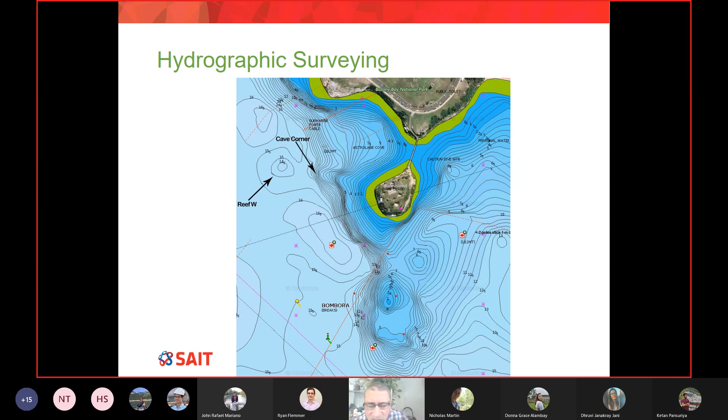And simply the purpose of this presentation was nothing more than to show you that surveying is not really as simple as what you thought when you had your first year course. I can tell you nothing can be built without surveying.

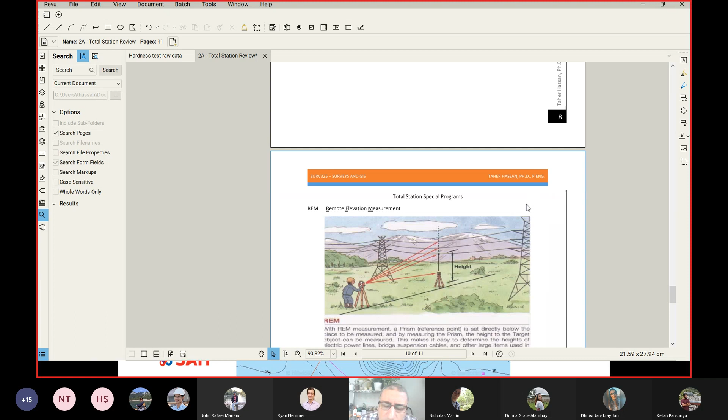So my next topic in our class, I have some slides available on D2L, which is a revision of total station. I know some of you will say, you know what, we had this before, so you're kind of repeating yourself, and I'm pretty sure I'm not. I am going to put everything in one perspective, and this ties into our next topic in our class, which is data processing.

So total station, what it does, it simply locates one point in space. It means with the help of total station, I can find XYZ. And I'm pretty sure that you guys know what XYZ means. Let me remind you. So I'm not going to do 3D. I'm going to make things simple. I'm going to make it 2D.

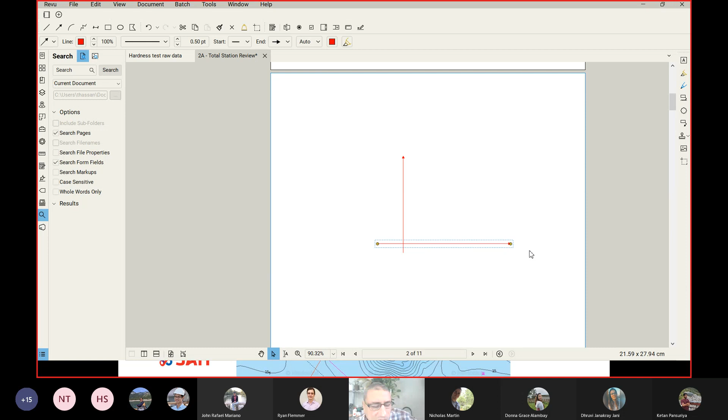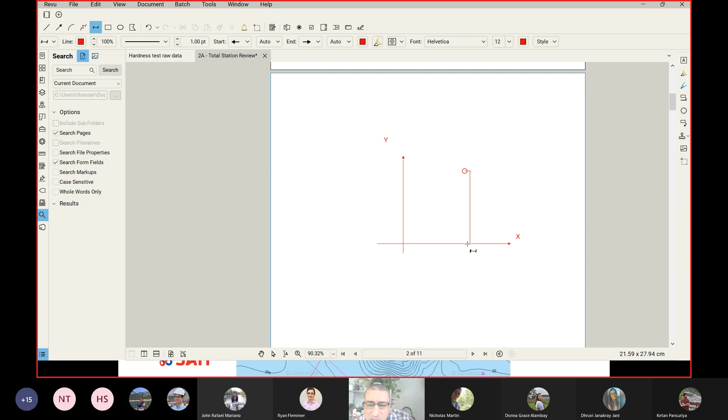So you guys know that there's something called Cartesian coordinates, and in Cartesian coordinates, this is your X, and this is your Y. And simply, if you have a point, let's say I have a point here. So this is my point. When I say locate the point, it means I want to find this point in relationship to the X, and this is called the Y dimension or the Y coordinate.

In addition, I want to locate this point relative to my Y axis, and then this will be my X coordinate. So again, if you expand the idea to Z, then you will see another dimension, which is the height of the point. So this is what total station does. It finds for you the X, Y, Z of one unknown point.

And by the way, if you know the X, Y, Z, then you can answer so many other questions. For example, if we know the X, Y, Z of 2 points, then we're able to find the distance between the 2 points. If we know the X, Y, Z of 2 points, we can find the height difference between the 2 points. If we know the X, Y, Z of so many points, which create a surface, then we can find the volume to, for example, do one project.

And if we know the X, Y, Z of so many points, guess what? We can come up with a map, because a map is nothing more than a bunch of X, Y, Z connected using line work. That creates your buildings and road edges and so on. So this is what we will be doing in the next class. For now, I want you to understand that total station simply finds for you the XYZ.

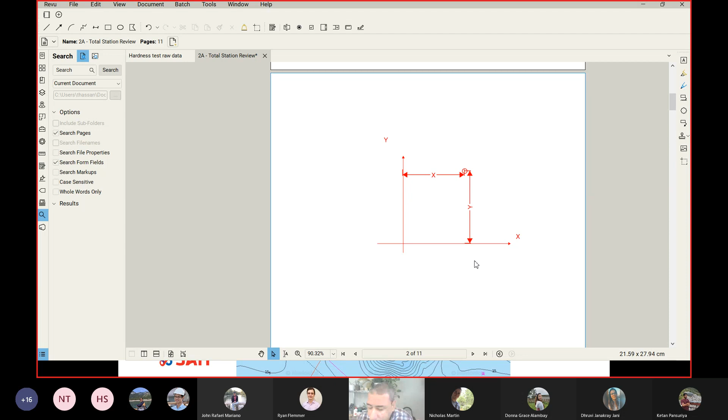So the first step when you try to measure the XYZ, not really measuring the XYZ, the first step is to create a frame of coordinates. And we do that through points called traverse points. Please, I need confirmation. Does anybody in this class remember the word traverse? Probably I want to write it for you. Okay, here we go. So here is the word traverse.

Okay, so anybody still remember from first year the word traverse? Please confirm. It takes you a little to unmute yourself and say, yes, I can remember. Yeah, I can remember about the traverse. Not much. At least I feel I'm not talking to myself. I remember something. Okay, so traverse, thank you so much.

And traverse is simply a few points, many points. It depends on the size of your area. And these points, we pick them carefully. Remember this, pick them carefully on site. So the traverse point location is not just any point on site, not random, because simply, number one, they cannot be in the middle of the road. Can they be? Can't be, otherwise they will be easily damaged, or the person who is surveying will be unsafe. So it has to be off the road.

Number two, there is an intervisibility condition. So whenever you are on top of one point, you need to see the previous point and the next point, because when we place these points on site, next we do some measurement. And our measurement in surveying requires line of sight. It means I need to be able to see from one traverse point the previous and the next point. So anyway, bottom line is traverse points are a collection of points that we carefully pick on site.

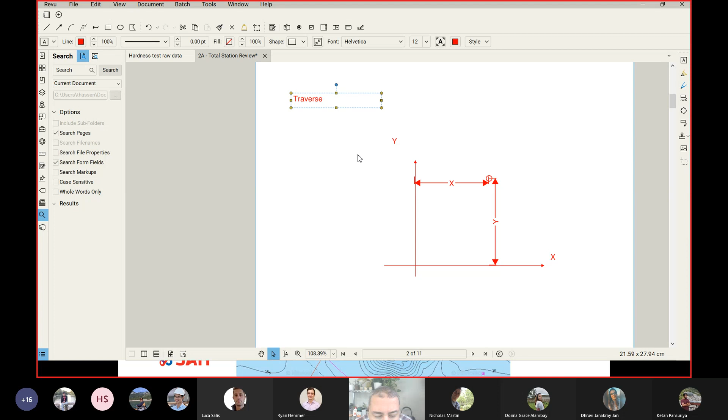Okay. Now, what is next after you carefully pick the point and use one method to fix them on site? Here is what has to happen next. We use a total station to take a few measurements, which is number one, all the sides of the traverse. For example, I'm going to give you a simple example. Let's say here I have one traverse point and then another traverse point here. Let's make it simple. Let's say we need only 4 points for our area.

So at each end of the line, we have a traverse point. So what we do next is measure all these sides. For example, from here to there, then from here to there, next from here to there, and then finally we measure from here to there. So those dimensions are measured using the total station, and I will share with you how shortly, because we have something in the total station that allows me to measure all the lines.

Next, we also have to measure all the angles. I'm going to start here. So here is one angle, and again you can see we measure all the internal angles.

Now what you see is something called closed traverse, and closed traverse, you know, it's fantastic, it's very good, because simply if I have a closed traverse, then I have a way to estimate and quantify how much error I have done. For example, if I measure all the internal angles, what should be the sum of the internal angles? Please help me. 360. Thank you so much, 360.

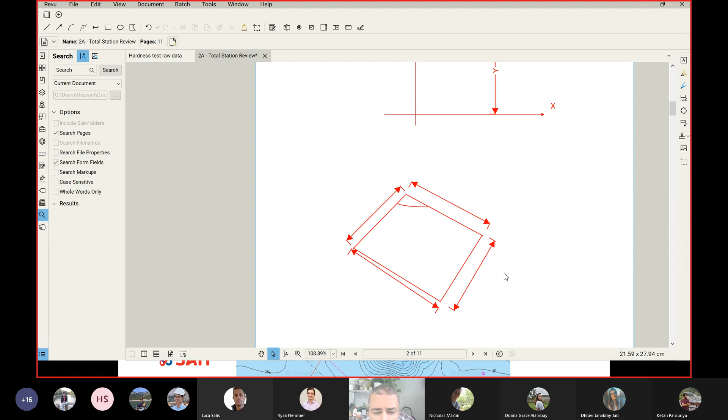So far we have no coordinate system. Yes, we measure a figure, and this figure is the traverse. However, I haven't established yet a coordinate system. If you know about math, what does it take to establish a coordinate system? Okay, I'm gonna clean things a little bit so you guys get the idea. I'm gonna clean all those dimensional lines just to make it a little bit clear. And now here we go.

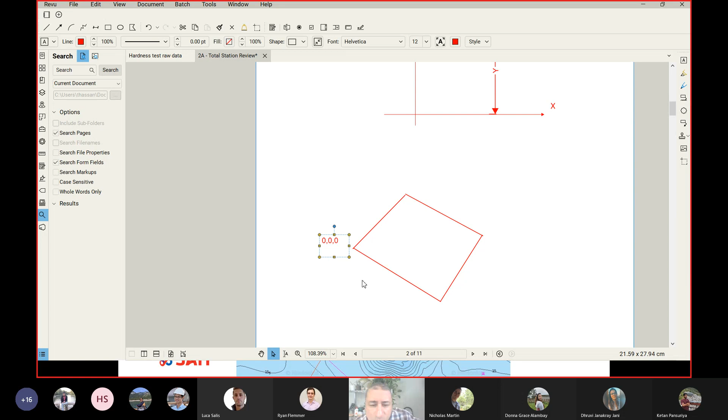If you want to establish a coordinate system, you need an origin. Which means I'm going to assume that the coordinate of this point is 0, 0, 0. So that's my origin. But origin is not enough. I need a direction. So I'm going to assume my first side of traverse is my Y. Or in surveying, typically I use N instead of Y. We leave Y for mathematicians and we use N for northing.

And if I do that, guess what? Here is my X. So my X will be 90 degrees to my Y, forming a right-hand coordinate system. I'm not going to call it X, because again, I'm going to leave X for mathematicians. I will call this one my easting, I use E. And I can find the coordinates of these points within the coordinate system that I have just established. Origin plus one direction.

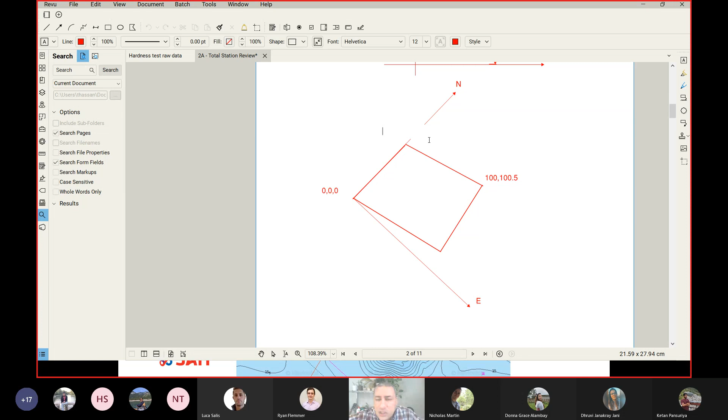So now, for example, I'm able to say this point is, let's say, 100, 100.5, and so on and so forth. So now I have a list of coordinates of all the traverse points. For example, this one will be 0, let's say 90.675, and so on. And this one, let's say, is going to be 120.125, 30.156.

Okay. And now, did I survey my area? So far, all I've done is I have established my traverse. And the traverse is the one that I will be using to survey anything close to the traverse line. For example, let's say I have a building here, and I'm going to give it a hatch. So this is my building. I want to locate this building in my coordinate system.

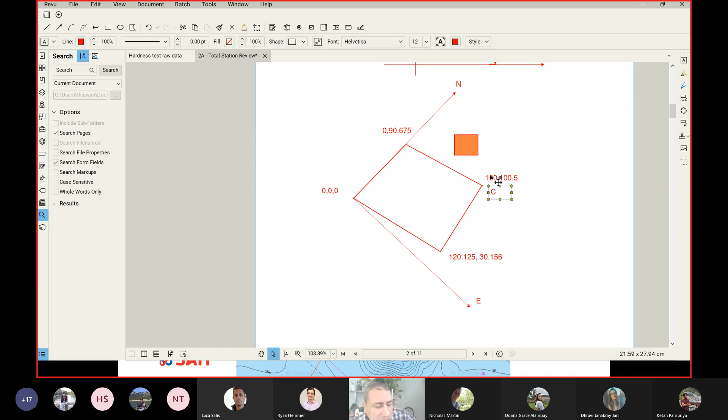Then what you will do is go ahead and occupy a close by point. For example, this point here, I give it a name, let's say point C. So I will be occupying point C. And once you occupy point C, you're going to send a helper. And this helper, you guys know what he should have.

The helper should have a prism, and then he's going to stand and place the prism on the corner of the building. And what I will do, I will just shoot this point here. Okay. When I shoot the point, I'm going to do some measurement, as I'm going to explain in details later on. And I will finally come up with this X, how much is X here, and how much is Y, and how much is my Z.

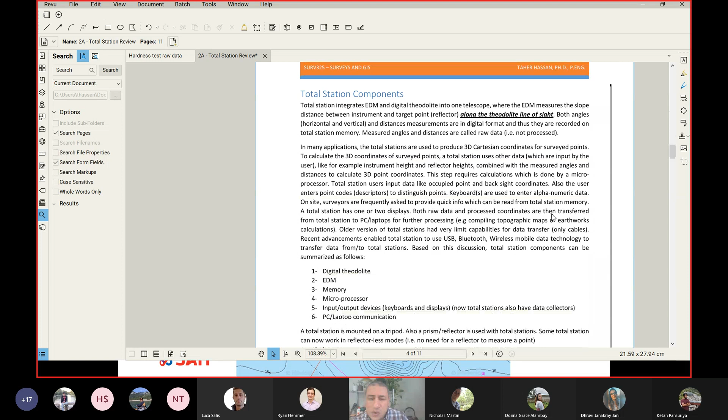This is how we locate a point in space. Step number one, locate the traverse point, measure the traverse, adjust the traverse, and then finally do the survey. What I will do next is I'm going to show you how the total station will locate and find for me the XYZ, and I will just take you into math.

Now, before we do so, can anybody tell me what the total station is capable of measuring? Does it measure, for example, temperature? Does it measure voltage? What exactly can a total station measure? So it measures the distance, angle, and height. Measure distance, angle, and height. Okay. Anybody else?

Anyone else can tell me what is the raw measurement? I'm not saying what it can calculate. I'm saying what it can measure, like the raw measurement. Sure, from the measurement, we can simply estimate something. Okay. I want you guys to differentiate from now between a measurement and a calculation. So, okay, I'm going to save the time. I'm going to tell you what it can measure.

As our friend said, it can measure distances and it can measure angles. And that's the only thing it can measure. It doesn't measure anything else. Distance and angles. And I will give you more details later on. But for now, please understand, total station measures only angles and only distance, nothing else. It cannot measure elevation or coordinates. Yes, the coordinates will be calculated later on, but not only based on the measurement of total station.

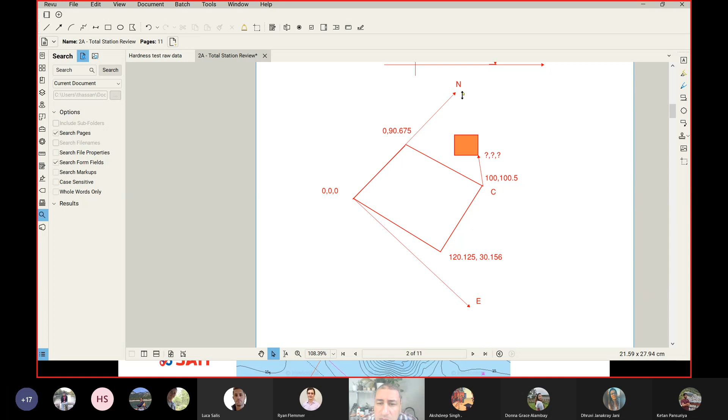Angles and distances are not coordinates, and this is obvious here. Look at this. You can see in this example, I have finished my traverse, all the angles and all the distances, and there is no coordinate until I say, you know what, here is my north, here is my 0, 0, and here is my east.

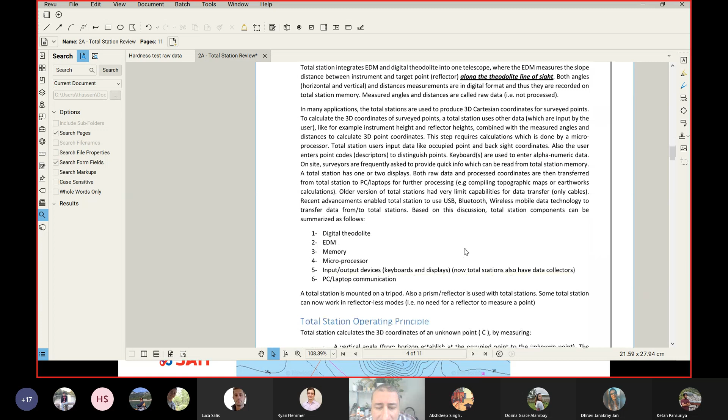Then I can find X, Y, Z. So angles and distances are not coordinates. We need to do further calculation. And you guys know, what can we use to do some calculation? It is something on your laptop called a processor. Processor, okay? So we need a processor, and what the processor does is it simply combines all your measurements in some mathematics and creates coordinates for you.

If you guys remember, on number 5, there's something called input and output devices. When I say keyboard and display, if you guys remember from last year, we need interaction with the total station. So the user will not just shoot the point and that's it. No, there are times where the user will have to input something, and sometimes where the user will have to retrieve something, and we need something to input and output in my total station. So any total station must have a keyboard, must have a display. It is not optional.

And then finally, number 6 here on my list, for sure, we need something to communicate my data. Once you finish the survey on site, we need to take the data and transfer it into my laptop or my PC to do further calculation. And there are so many ways to do that, starting from a simple cable that hooks your total station into your laptop or PC. And recently there are a few advancements, like for example, Bluetooth, infrared, and SD card. So there are so many ways to take the data from the total station and transfer it over to my laptop or PC.

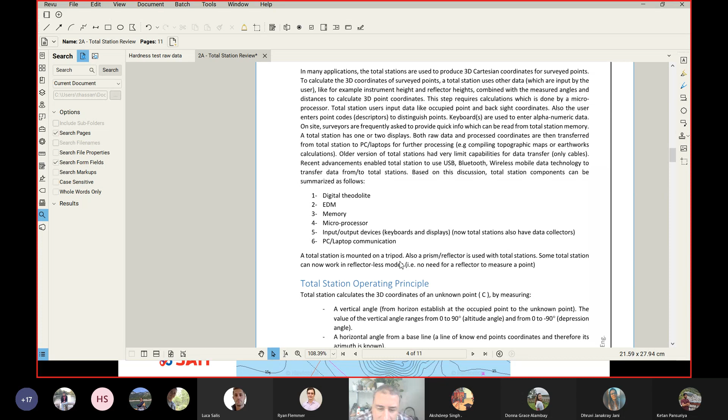If there is no battery, remember the EDM simply uses energy. So you can say the battery is number 0. I didn't put it here, probably it's a mistake, but it's the battery. I want everyone to understand that the battery is not optional. We must have a battery to operate the EDM and also the digital theodolite. Now you know the components of a total station, but now I'm gonna put things in perspective and show you how this thing works.

Okay, let's be clear before we start. Let's be very clear. A total station can do only 3 measurements. Only 3 measurements, and the 3 measurements are listed here. So here is number 1, number 2, and number 3. As you guys said, it can measure a distance, but let's be specific, because distance can be a slope distance, or it can be a projection of the distance, a horizontal one. So let's make it clear. A total station measures a direct or slope distance between the total station and the center of the prism.

So in addition to the slope distance, it measures angles. And in surveying, there are only 2 types of angles, not 3. One is called a vertical angle, and the other one is called a horizontal angle. Vertical, horizontal. That's it. Maybe in math there is something called a spatial angle, which we don't care about in surveying. We only measure a vertical angle in a vertical plane and a horizontal angle in a horizontal plane. And those are the only measurements. A total station cannot measure anything beyond those 3 numbers. That's it.

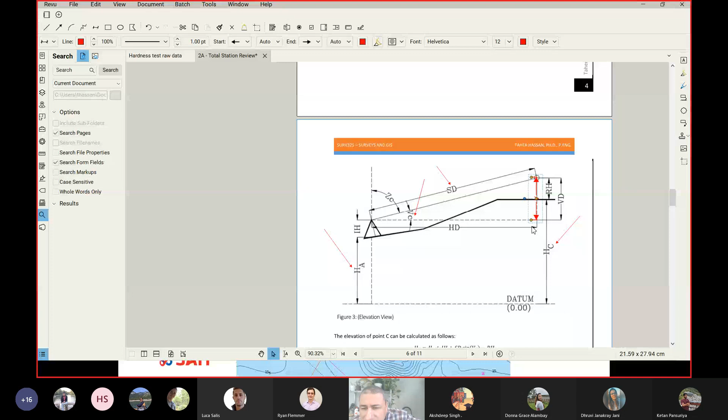Yes. Okay. But by the way, when you think about it, and I'm going to make it in red here: if I am now able to estimate the V, capital V, and I have the HA, is there anything else missing that I must measure and feed in the total station to give me the HC? By the way, it's already on my slide. It's not an invention. There is something missing already. Okay, I'll give you help. What do you think about the instrument height?

It should be given. We know. It's not given, sir. It's not given. Be careful about your language. It's not given. Who is going to give it to you? You. Well, we measure on site when we put the tripod. Exactly. Thank you so much. Is it Lucas? Yes. Thank you so much. Yes, we measure it. So we use our measuring tape. We measure the instrument height, and then we feed the instrument height into the total station.

What else? What do you think? What else on the same picture? Okay, I'll help you out. It's on the other side. So on the other side here, there is RH, which is the reflector height. So the reflector height we also need to measure and feed to the total station before we hit enter. Remember, HI is one time, because as long as the setup is the same, HI doesn't change until we move the total station. But the reflector height can potentially change from one point to the other point. You must enter the reflector height before you hit enter. Otherwise, if you have a wrong reflector height, then the elevation will be wrong.

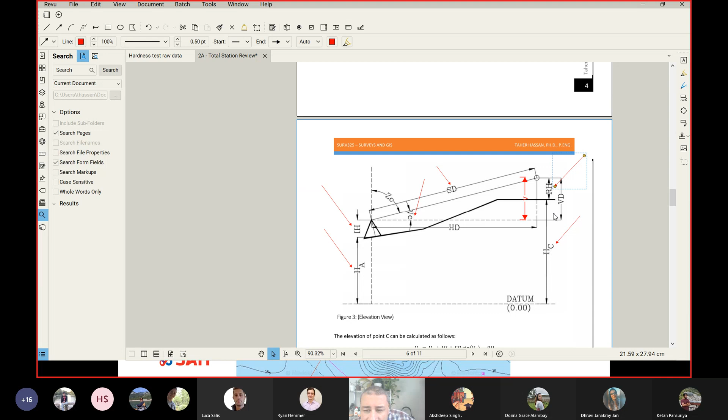Okay, finally, how can I find my HC? Here is the equation. I'm going to box it out, which is not very difficult. So HC on the left side, the point of unknown, is equal to the elevation of point A, which is a control point, a traverse point of known elevation. You add to that the instrument height, and then you add SD multiplied by sine of the vertical angle, which gives you the V, and then finally we subtract RH.

Now, if you think about it, look at the signs: why do we have to add IH and why do we have to subtract RH? You can see the total station, where the laser beam goes along the line of sight, is always above the control point, always above, unless you're Batman. So the total station is always above the point on the ground. That's why we always add IH.

However, in most cases the point of interest, and I want to be clear where the point of interest is, this is the point of interest. It's the point on the ground; the center of the prism is not the point of interest. You can see there is a vertical offset between the center of the prism and the point of interest. And look at this: the point of interest falls below the center of the prism. That's why we need to subtract RH. And in most cases, 99% of the cases, the point of interest is on the ground, RH below the center of the prism.

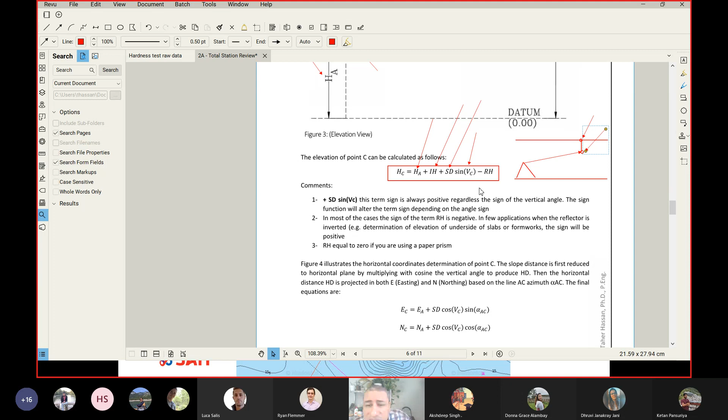One last thing before I give you a break: let's look at VC. Okay, so guys, vertical angle. Vertical angle is the angle from the horizon up to the point or down to the point. So the vertical angle sometimes can be 0, sometimes 5 degrees, 10 degrees, 20 degrees, maximum of 90, and that's only theoretical. However, it can also be below the horizon. So we have a depression angle, and it can be minus 5 degrees.

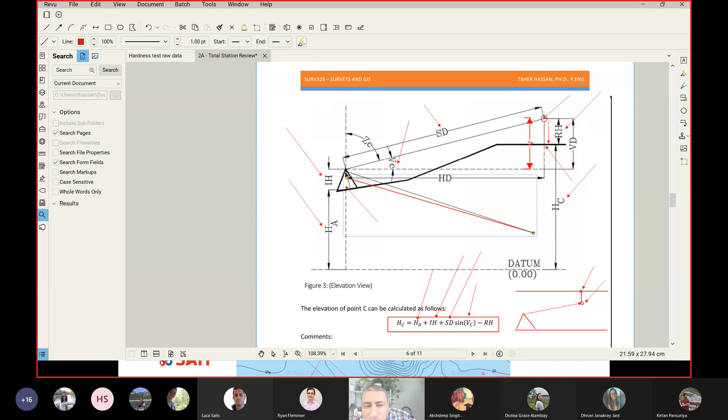For example, if I'm on the top of a mountain and I'm shooting a point in the valley, you can see my line of sight is below the horizon. And if my line of sight is below the horizon, the vertical angle is negative, minus 5 degrees. Now, here is my question before we break. If my vertical angle is negative, should I change this equation, or does my equation stay the same? What do you think?

It stays the same, just that the value is negative. Thank you so much, and I want everybody to have the same belief. So exactly as Lucas said, the vertical angle doesn't change the equation, even if it's negative. Really, the sine function or the cosine function are smart functions, which means if you have a negative angle, like a depression angle, the sine will come with a negative value. So when you do the manual calculation, very simple, don't change the equation.

The sine of minus 5 degrees is equal to minus sine 5 degrees. So on your calculator, you will say plus 200 meters for SD multiplied by sine minus 5 degrees, and simply the sine will take care of changing the sign in front of SD. So please take note that we do not change the equation.

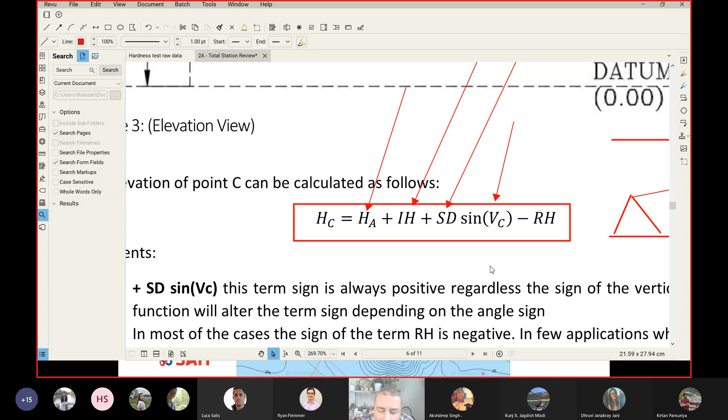Now, I know some of you will ask, going back to the same problem here: what happens if I am measuring a point on the underside of the ceiling, the underside of the slab? How can I change this equation if you just told me that it's built in? No one can change it. Any help? We can change the minus RH to plus RH.

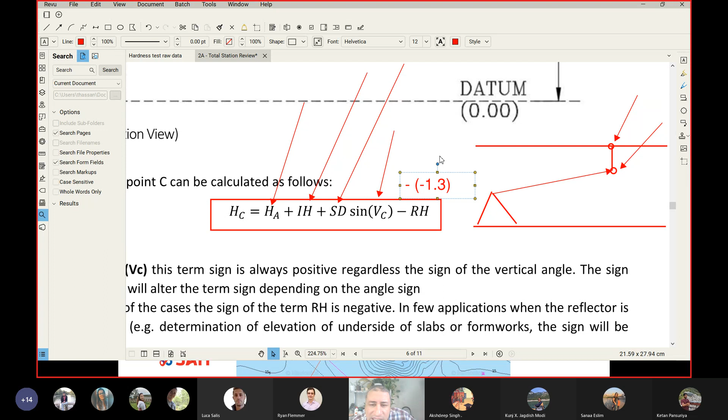You cannot change this equation in the total station. All you have to do is input the RH in the display with a negative value. So for example, if this is 1.3 meters, you input negative 1.3 on your screen. Because you input minus 1.3, by mathematics you have negative and then negative 1.3, so you end up adding the RH to your equation. So whenever we measure a point on the underside, whenever our rod is upside down, we input the RH as a negative value. Any questions so far?

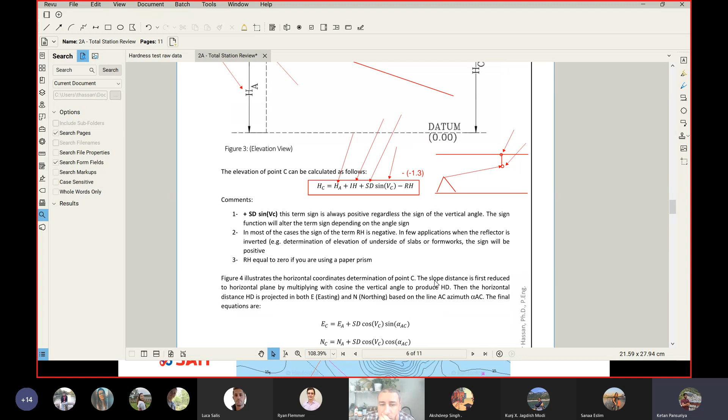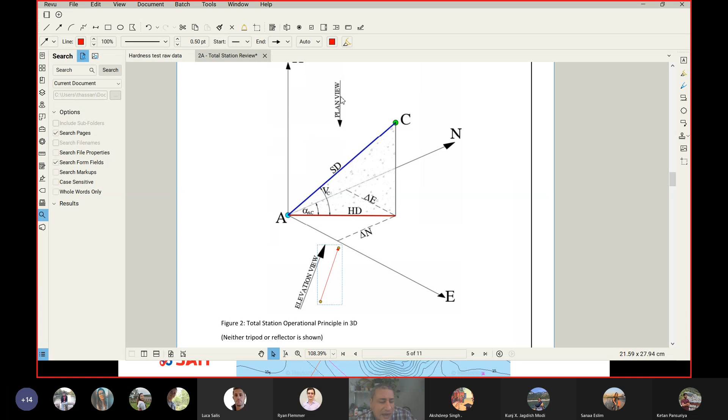Okay, if there is none, go ahead. What is the role of the horizontal angle? How do we use it? Excuse me, say it again. For the horizontal angle, how do we use it? This is my discussion after the break. Remember, to generate the elevation, we looked this way. If we want to find the easting and the northing, we simply put our eye here and look from this direction. This will take us to this plan view drawing. So please be patient, and after the break you will see how we estimate the easting and the northing. Any question for now?